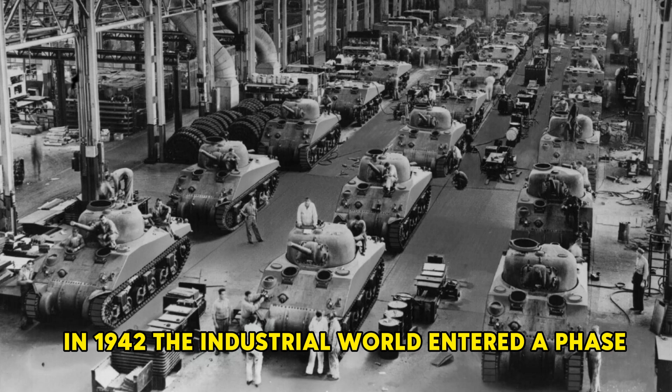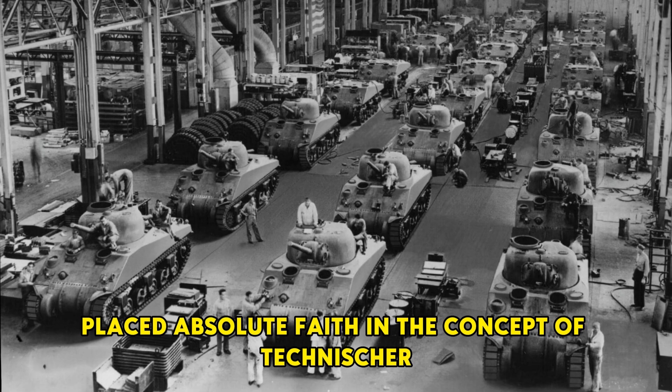In 1942, the industrial world entered a phase in which machines were no longer merely tools, but had become symbols of a nation's soul. Germany placed absolute faith in the concept of technische Überlegenheit, technical supremacy. It was not merely a production philosophy, but a religion of an empire that believed mechanical perfection could determine the fate of war.

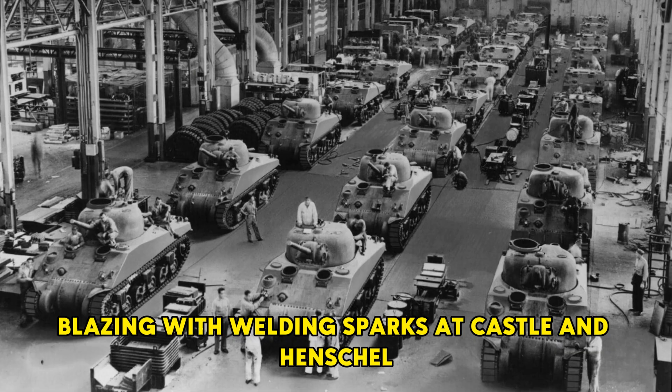In the factories blazing with welding sparks at Kassel and Henschel, every screw thread, every bearing was ground to absolute precision. A German machine was not simply a weapon. It was a declaration of intellect and order.

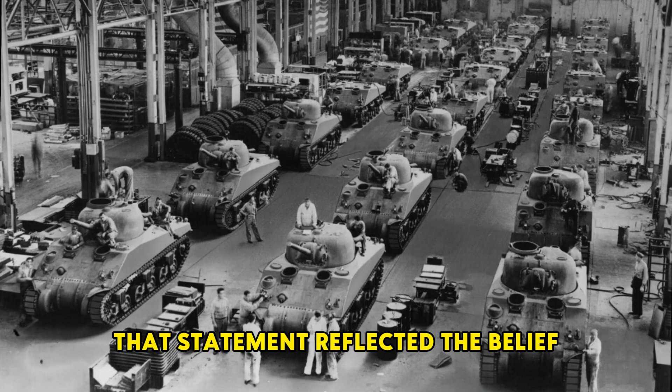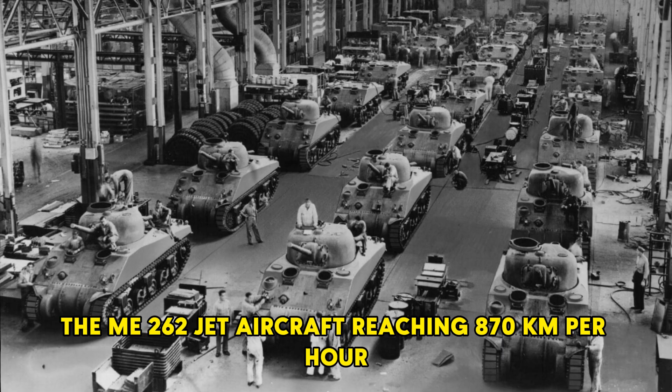"We will win because we build better," said a panzer engineer in a 1943 interview record. That statement reflected the belief widespread throughout the Reich: perfect engineering would triumph over numbers. From the 68-ton Tiger tank, the Me-262 jet aircraft reaching 870 kilometers per hour, to the V-2 rocket flying 320 kilometers, every project bore the same DNA, an absolute obsession with refinement.

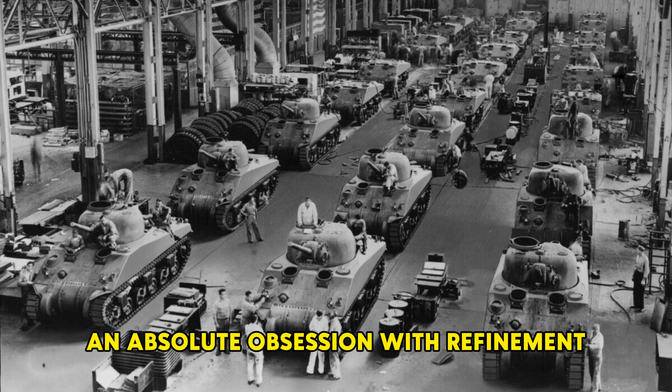According to the Wehrmacht Logistics Office, in 1944, producing a Tiger tank required 300,000 man-hours and cost 650,000 Reichsmarks. That figure reflected not just expense, but a cult of craftsmanship. They were willing to pay an infinite price for precision.

Across the Atlantic, America wrote a different equation. "Good enough wins wars," was the motto echoing through every production shift at the Detroit arsenal. For them, victory did not come from the strongest tank, but from the thousands of good enough ones rolling off the line each month.

According to the U.S. Army Ordnance Department, in 1943, the Detroit Arsenal factory produced one Sherman every 60 minutes. At Willow Run, the B-24 Liberator assembly line run by Ford set a record of one aircraft every 63 minutes. When a Ford engineer was asked why they didn't refine it further, he laughed: "Perfection slows production. Soldiers don't have time for perfect."

That philosophy created a system where efficiency defeated sophistication. Every Sherman leaving the factory was designed to be disassembled and repaired at the front line with a basic toolkit. Interchangeable parts, standardized bolts, simple welds. Nothing was exquisite, but everything worked.

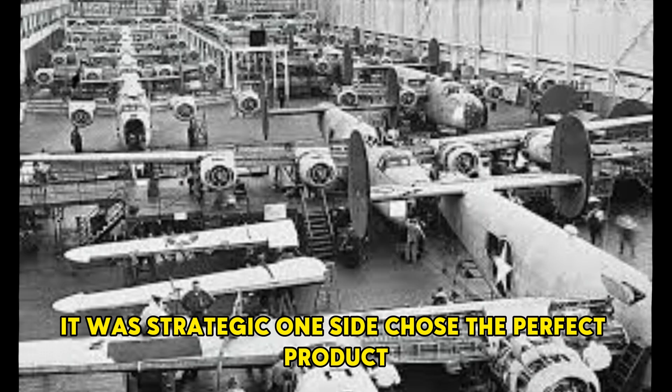According to the 9th Army Logistics Division, more than 49,000 Shermans were produced between 1942 and 1945. In contrast, Germany completed only 1,384 Tiger I tanks during the same period. The disparity was not merely numerical, it was strategic. One side chose the perfect product, the other chose the indestructible one.

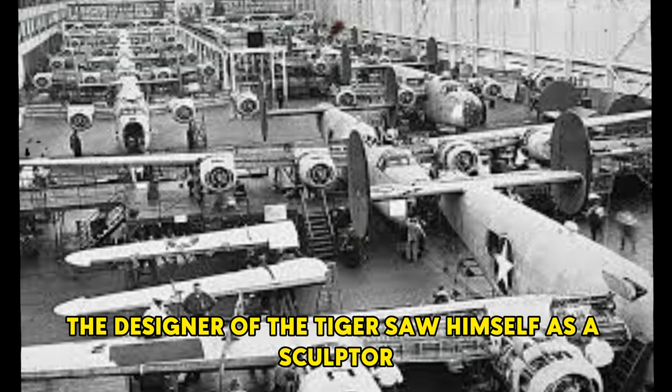That cultural gap was visible not only in the workshops but also in the engineer's state of mind. In Germany, the designer of the Tiger saw himself as a sculptor, with each detail embodying the beauty of precision. In America, the ordnance engineer viewed himself as a craftsman of the battlefield, tasked with ensuring the machine kept running through mud, sand, or snow. "We don't build heroes, we build tools," Life magazine quoted a production manager at General Motors in 1944.

According to industrial historian Walter Dorn, World War II was a war between two engineering ideologies. Germany believed a perfect product could overpower the enemy. America believed a perfect production system could crush every individual product. From that point on, war was no longer a clash of armies, but a clash of two mindsets: engineering as art and engineering as logistics.

When American supply ships docked in Liverpool, carrying hundreds of Sherman tanks and thousands of crates of spare parts, British officers remarked, "America isn't sending tanks, they're sending an assembly line." The statement was both admiration and prophecy. While the Tiger required a team of engineers to operate, the Sherman needed only a few soldiers to start it, replace the tracks, and move on.

In 1944, analysts from the US Army Ordnance compared the two philosophies in a classified report: German design optimizes the machine, American design optimizes the system. And in modern warfare, the system always triumphs over the machine.

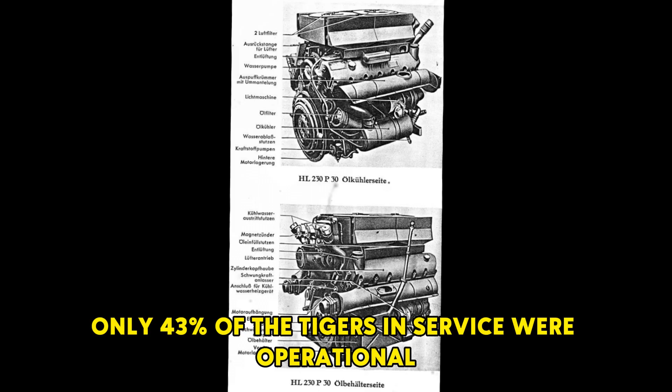According to a March 1944 report from the 2nd Panzer Division, only 43% of the Tigers in service were operational at any given time. The Tiger was born to conquer, but its sophistication made it fragile.

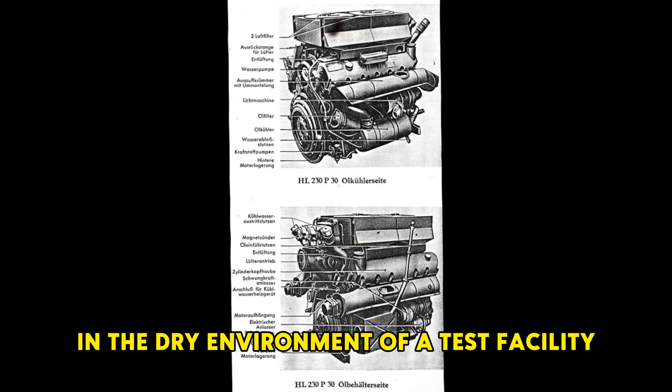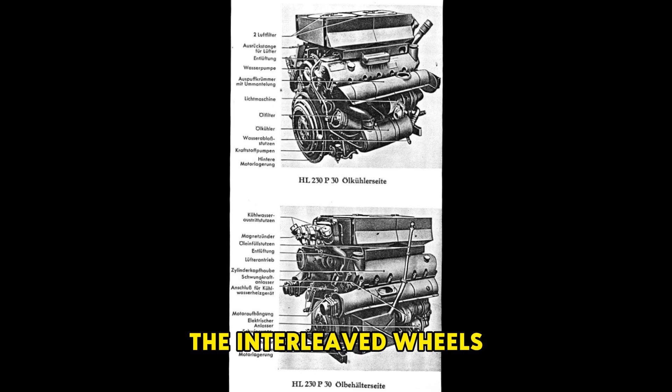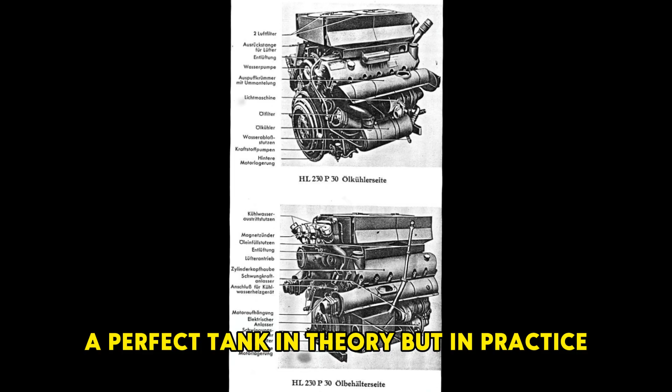In the dry environment of a test facility, it was a testament to German engineering prowess. On the muddy battlefields of Normandy, it became a vulnerable mass of steel. The interleaved wheels, once praised in technical drawings, turned into traps. An American officer wrote in a July 1944 battlefield report, "A perfect tank in theory, but in practice, it fights the terrain as much as the enemy."

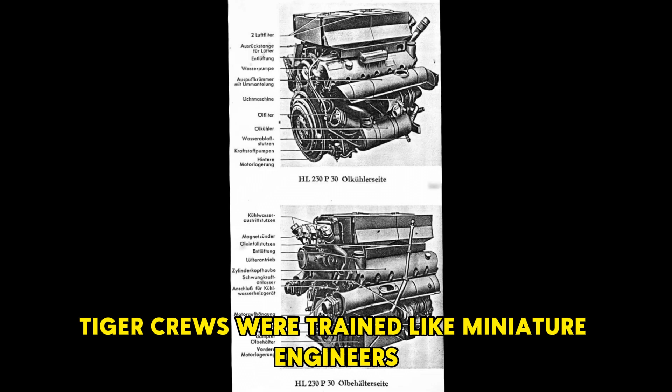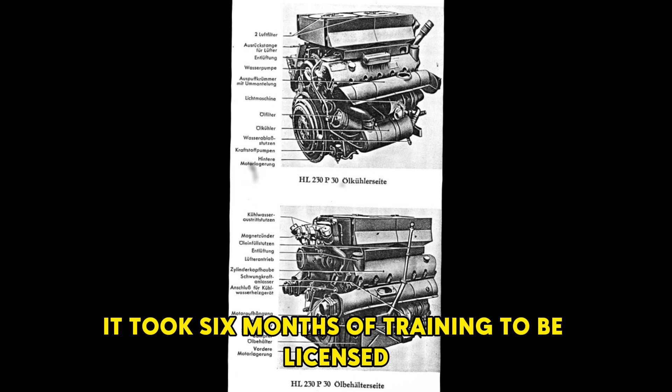That perfection also created a psychological burden. Tiger crews were trained like miniature engineers. They had to understand the wheel structure, transmission system, gun pressure, and hydraulic controls. It took 6 months of training to be licensed to operate one. Many soldiers said that driving a Tiger was like marrying a machine, powerful but endlessly demanding.

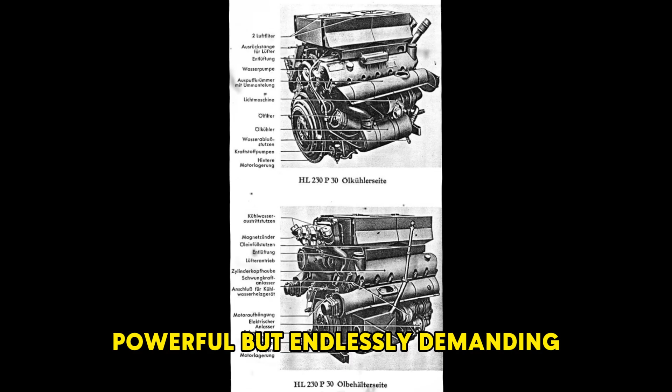When German engineers signed off on the Tiger's blueprint, they believed they were creating the perfect weapon, and indeed it was the pinnacle of engineering thought. But all perfection has limits.

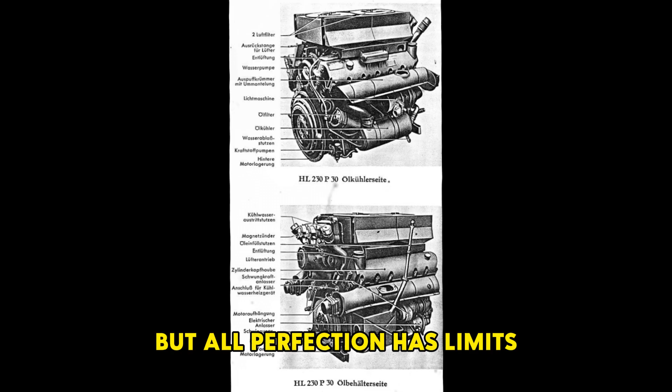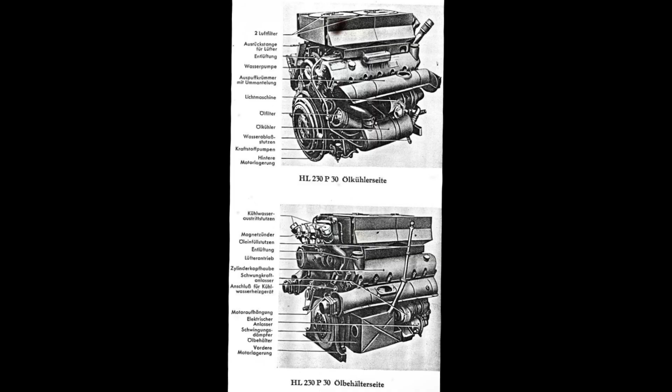Normandy, with its thick mud, wire fences, and countless random elements, turned every strength into a weakness. In an ideal world, the Tiger ruled. In the real one, it fought not only the enemy but also its own sophistication.

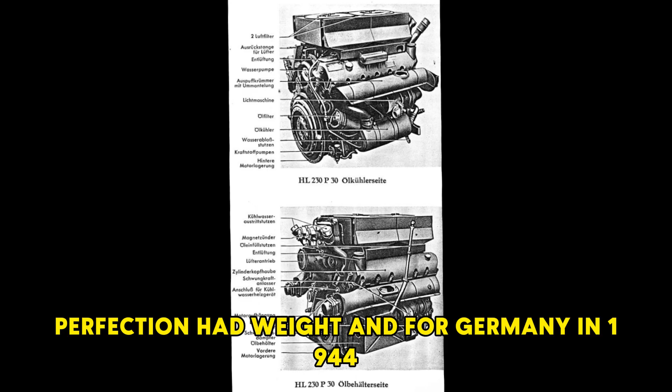Perfection had weight, and for Germany in 1944, that weight was 68 tons.

James Mallister arrived in Normandy with the second wave of reinforcements of the 1st Infantry Division. He was only 23 years old, formerly an electrician from Pittsburgh, Pennsylvania, where the hum of lathes and the smell of burning copper had followed him since his teenage years. When America entered the war, Mallister enlisted in the engineering corps, believing his knowledge of wiring and current could help save lives rather than take them.

But the European front cared nothing for ideals. In Normandy, the engineer's duty was not to design but to survive: clearing mines, building pontoon bridges, and clearing roads through fields littered with wrecked vehicles. He reached Omaha Beach on the 5th day after D-Day, amid rain and the stench of burnt smoke.

Everything he had learned in the workshop no longer mattered. Electrical lines here were snapped, cables tangled in mud and blood. An officer told him, "In war, wire isn't for circuits, it's for survival." That sentence haunted him for months. He began to observe everything like a craftsman, trying to reconnect a broken circuit not with copper, but with instinct.

In his first days in France, Mallister was assigned to a company tasked with clearing dirt roads around Carentan. According to engineer logbook No. 14 of the 1st Division, the area had been devastated by retreating German tanks, many abandoned for lack of fuel.

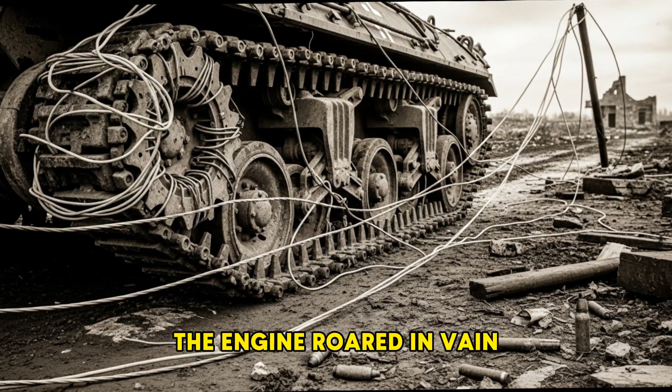The engine roared in vain, black smoke pouring from the exhaust. From his hiding place, Mallister heard a short shout in German, then silence. He couldn't understand the words, but the tone carried fear.

As the first Tiger stalled dead in the road, the three tanks behind it stopped immediately. The road was too narrow to turn around, and on both sides stood high fences and soft soil. Any attempt to move would bog them down. Within a single minute, four machines worth over 6 million Reichsmarks were immobilized by a telephone wire weighing less than 8 ounces.

According to the 1st Division's fire log, at 6:30, coordinates Carentan 1-4 were marked for artillery support. Three 105mm howitzers from Battery 32 fired the first salvo. Shells detonated 20 feet above the ground, raining steel fragments down on the accompanying German infantry. The survivors fled, leaving the Tigers stranded.

By 7, American observers reported, 'Enemy armor halted. Crews surrendering.' After the battle, Company B's combat report stated, 'A communication wire, when properly tensioned, can disable heavy armor by mechanical jamming.' It was the first time in the history of warfare that a wire designed to transmit signals had become a weapon of destruction.

A soldier who was there later recalled, 'The tank didn't explode, it just stopped. It was like watching a giant inhale and forget to exhale.' That image spread throughout the regiment, a moment where mathematics, luck, and instinct converged.

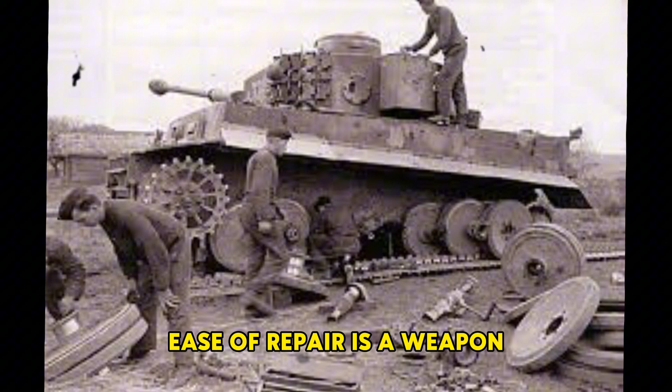In other words, for every kilometre travelled, Germany consumed ten times the logistical resources of the Allies. In industrial warfare, faster repair could matter more than thicker armor or stronger firepower. As one American officer said during the 1946 debriefing session, 'Ease of repair is a weapon.' That phrase became the new motto for post-war design generations.

Numbers do not lie. Between 1942 and 1944, Germany produced 1,384 Tiger I tanks, while the Soviet Union built 57,000 T-34s, and the United States rolled out 49,000 Shermans. The ratio of 35 to 1 favored the Allies completely. One nation built perfect machines, the other two built tens of thousands of machines that were merely good enough.

While the Germans stopped to perform maintenance, their enemies were already sending hundreds of new tanks into battle. According to statistics from the 9th Army Ordnance Branch, during the Battle of Kursk in 1943, for every Tiger destroyed, the Wehrmacht spent an average of 200 maintenance hours and 3 days of resupply to replace it. Meanwhile, the Soviet Red Army needed only 30 hours of maintenance and 12 hours of resupply for a new T-34. The more complex the machine, the longer the supply chain, and that very chain became a strategic weakness.

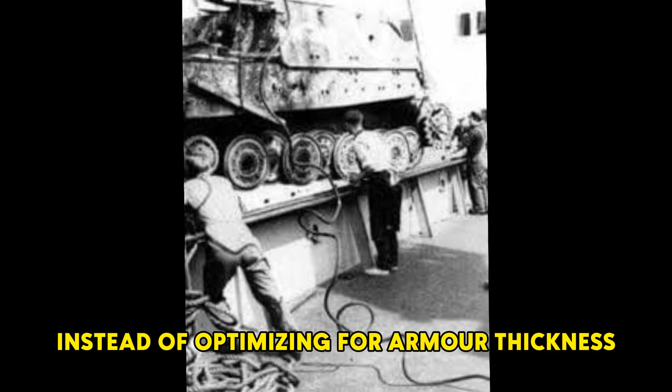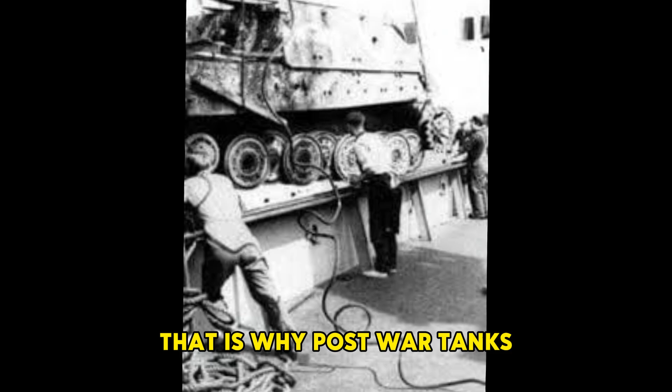After the war ended, these lessons were systematized into a doctrine. At the first NATO conference in 1949, military engineers collectively approved a new standard known as crew-first design. This philosophy completely reversed the mindset of the 1930s. Instead of optimizing for armor thickness or mechanical precision, the priority shifted to crew survivability and maintainability under combat conditions. That is why post-war tanks, from the M48 Patton to the M1 Abrams, used fewer wheels, six per side, non-overlapping, replaceable within 15 minutes.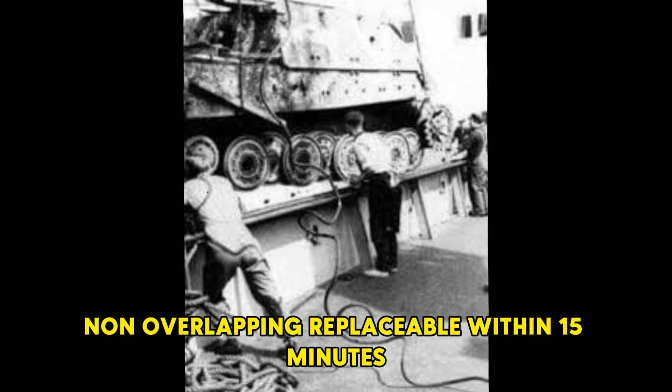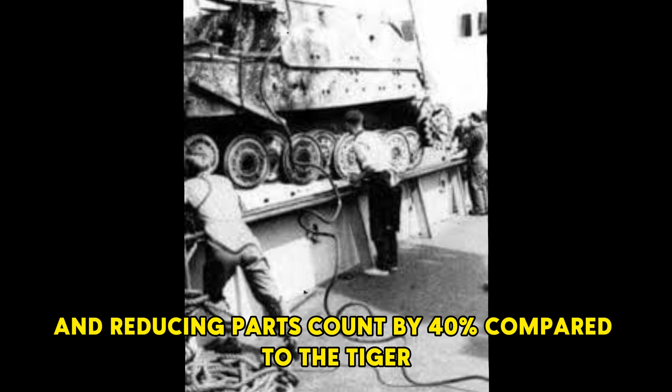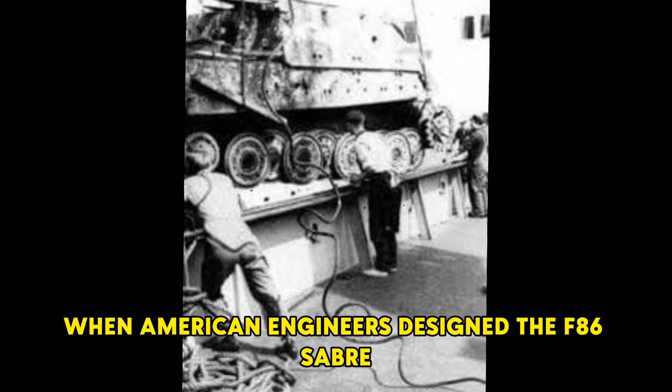Germany's later Leopard 2 followed the same idea, simplifying its suspension system and reducing parts count by 40% compared to the Tiger. The lesson of the Tiger extended far beyond tanks. It influenced aviation and the entire mechanical industry. When American engineers designed the F-86 Sabre, they noted in the documentation, 'Maintainability equals flight time.'

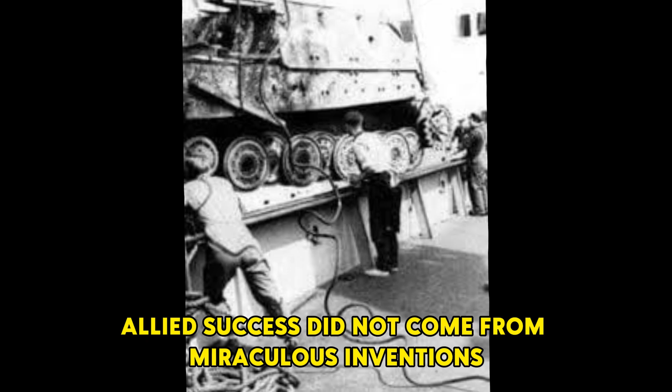Allied success did not come from miraculous inventions, but from the willingness to accept imperfection. They understood that in war, a system that fails gracefully will always defeat one that cannot afford to fail at all.

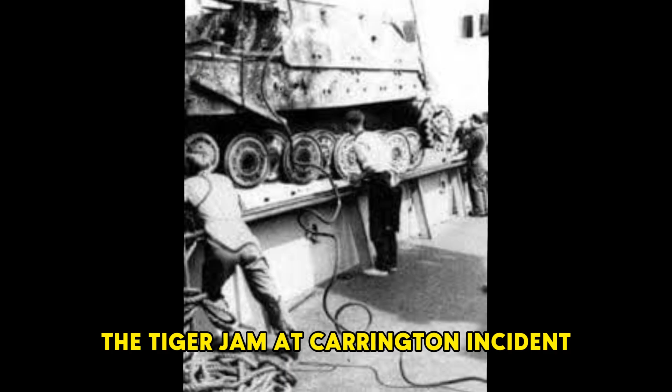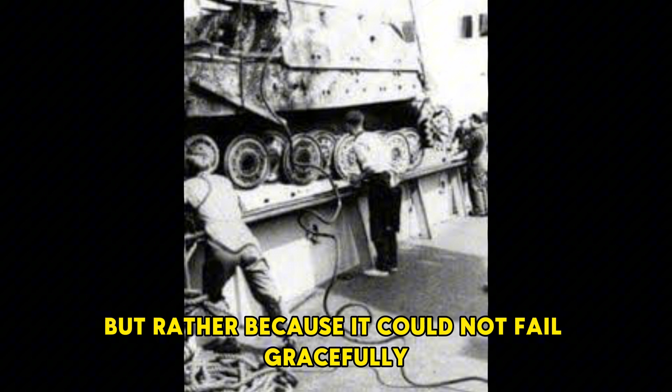By the 1960s, when U.S. military engineering academies revised their curricula, the Tiger jam incident at Carentan involving James Mallister was included as a case study in applied field innovation. In lectures, instructors often asked students, 'Why did the Tiger stop?' And the answer was never, 'because of the wire,' but rather, 'because it could not fail gracefully.' The German machine was built to function perfectly or not at all, while American design philosophy embraced controlled imperfection.

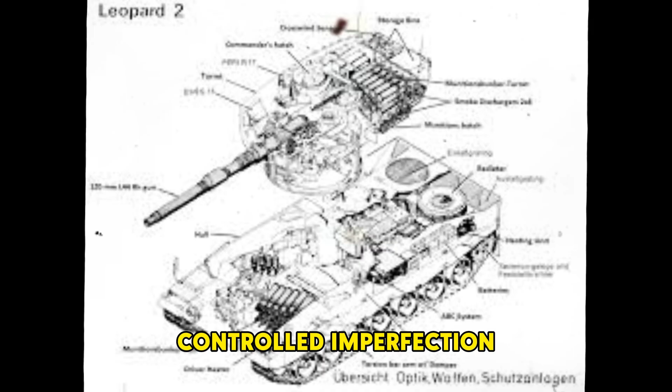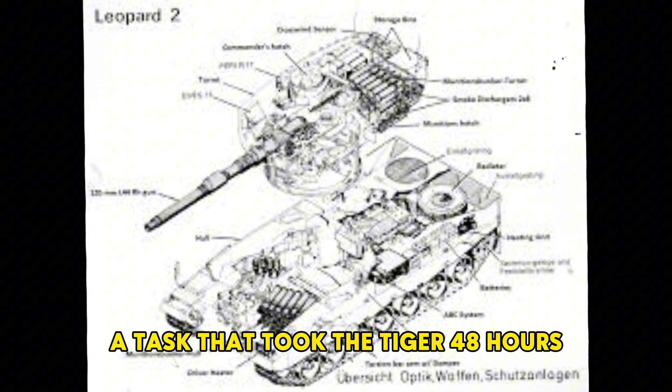According to the 1978 NATO technical analysis, the M1 Abrams could have its engine replaced in 30 minutes, a task that took the Tiger 48 hours. Such seemingly small details demonstrated the evolution of design philosophy since World War II. The simpler the machine, the longer it lived, the easier the repair, the stronger the army's endurance.

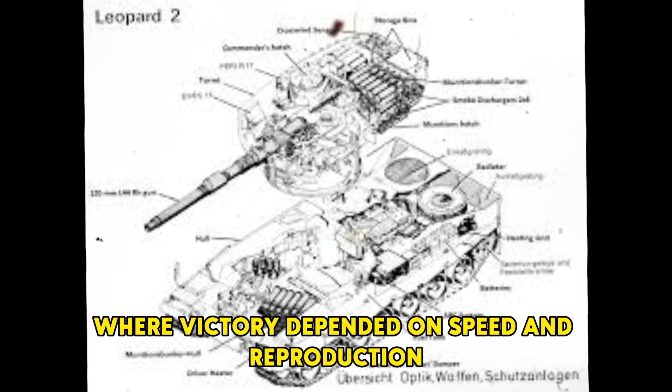The Tiger became a symbol of German engineering pride, but also an example of engineering irony, the paradox of sophistication. In a world where victory depended on speed and reproduction, perfection became a burden. A machine could achieve flawless precision in a factory, yet be powerless in the mud of Normandy.

In the final assessment of the U.S. Army Technical Board in 1945, it was concluded, 'The Tiger proved that mechanical perfection and battlefield survivability are inversely proportional.' Germany triumphed in science but failed in practicality, and that lesson went on to shape the entire century of engineering that followed.

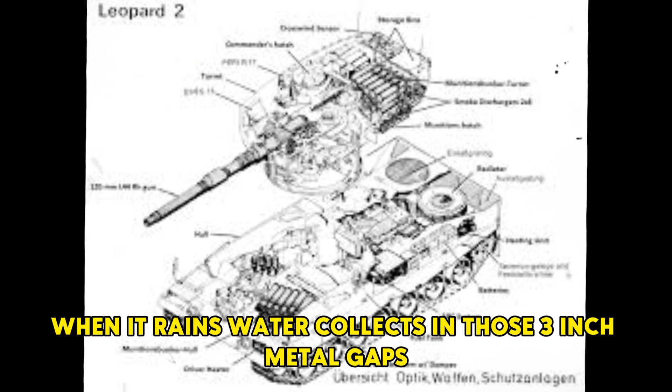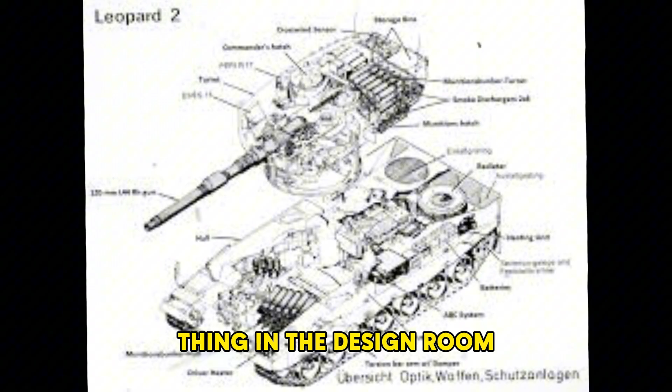Across the scrap-strewn fields of Normandy, the remains of the Tiger still lie silent, its interleaved wheels rusting in the grass. When it rains, water collects in those 3-inch metal gaps, reflecting the dim glow of sunset. It stands as a quiet reminder of what every military engineer knows: perfection is the most beautiful thing in the design room and the most dangerous on the battlefield.

When the war ended, Europe was covered with twisted heaps of steel, the remnants of an era when engineering was used more to kill than to live. Yet among those burned-out wrecks were stories that still make engineers pause to think.

One of them was the account of the young electrician from Carentan. The story of James Mallister was not just the achievement of an individual, but proof that the engineer's way of thinking could reshape the battlefield itself.

The 20th century was the century of blueprints. From the laboratory in Peenemünde, where Wernher von Braun calculated the trajectory of the V-2 rocket, to the Detroit workshop where Charles Sorensen optimized the B-24 production line, every engineer was fighting another kind of war, a war between models of thought.

Each drawing, each mechanical diagram was a declaration of how humanity understood the world. The Germans believed in the supremacy of precision. The Americans believed in the power of adaptability. And between those two extremes, Mallister emerged not as a scientist, but as a practitioner, the one who proved that an understanding of matter could defeat an entire industrial doctrine.

According to the Engineer Corps Review, in 1947 American military engineering schools began using the Carentan case as a classic example of field innovation under pressure. They called it the Mallister principle, the principle of creativity born from limitation.